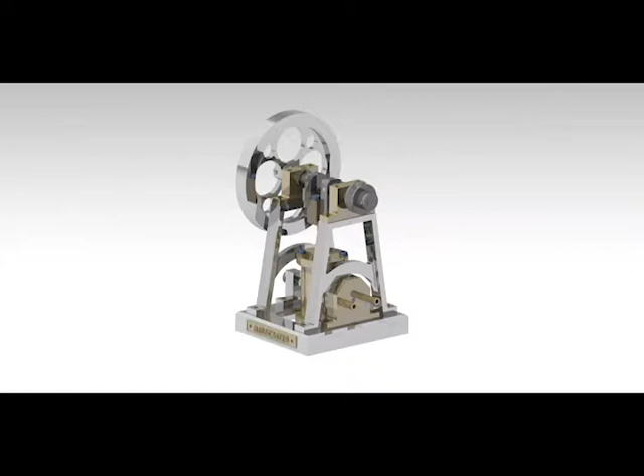Hi there, my name is Tucker Hawkinson, and welcome to the first part of a two-part series on our EGR305 project. The overall goal of this project was to create an engine using a predefined set of drawings for all the engine parts. And as you can see from the image in the front, we ended up choosing the double

oscillating engine. This engine had many components, and we decided to break it up as it was broken up in the drawing. That meant that we had four main subassemblies that were broken into other subassemblies. The first main one was number 1, and that is the base of it. The second is the flywheel and crankshaft and the pulley. The third is the cylinder in the bottom left. And the fourth is the piston assembly.

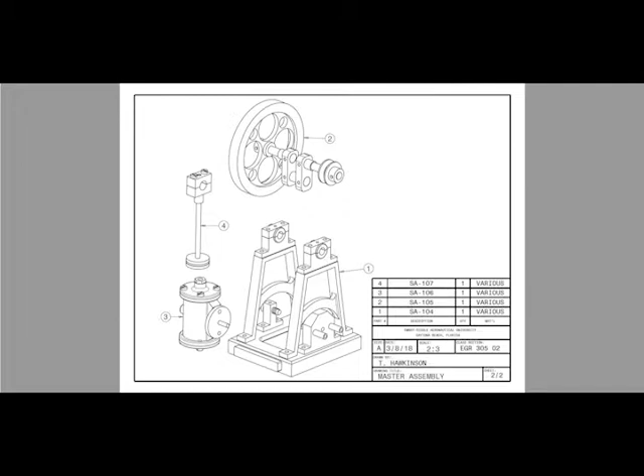So now we're going to break it up into subassemblies. The first subassembly that we'll talk about is the flywheel and crankshaft subassembly. This subassembly, as shown right now on the screen, consists of a flywheel and a crankshaft and a pulley. So we're not going to go into how every single part was made, but there are a couple that I do want to point out since they were more complex geometry than others.

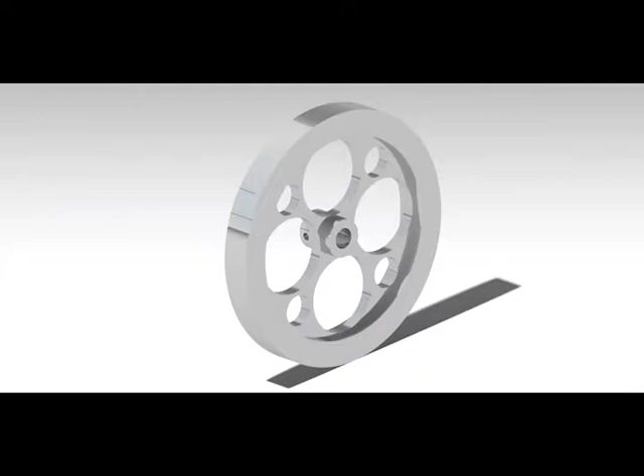The flywheel is one of them, and a simple solution to this one was to start it by one shaft command getting the grand majority of the geometry, and then from there we were able to cut out certain areas and make some circular patterns, as you can see, to create what seemingly complex geometry.

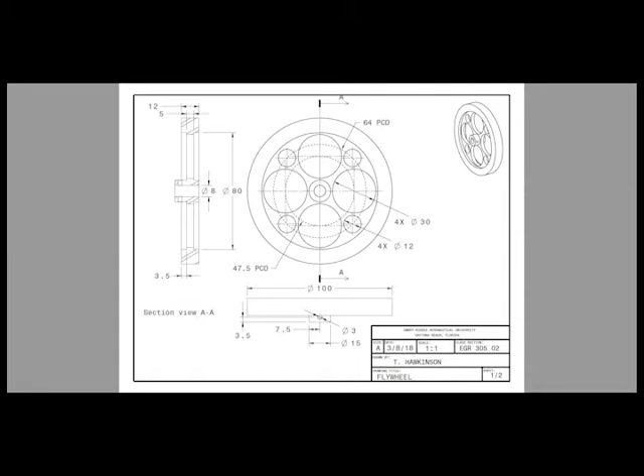The crankshaft was not a complicated part, but had a lot of pieces to it. As you can see, it's made up of a few different pieces. There's two rods that end up connecting to the pulley and the flywheel. There's one rod in the center that connects the piston assembly, and then there's two blocks that allow an eccentric

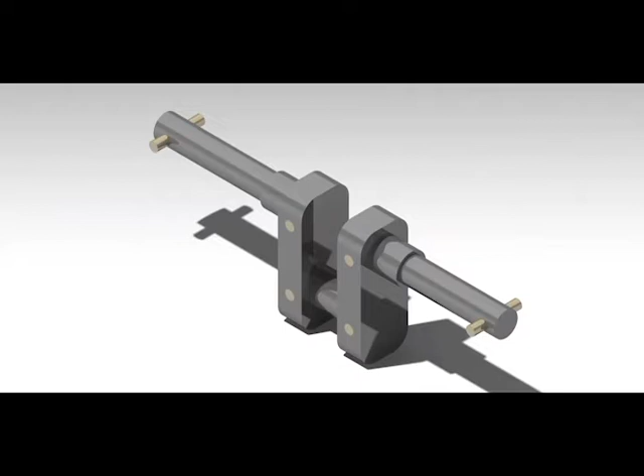rotation around. The brass pins that you see are press fits in there to allow the whole assembly to go together. Again, none of these parts were very complex. It just created an extra subassembly. The pulley was an extremely simple part. It just had a single shaft command with a hole through it. The geometry on the shaft command was a little bit complex, but nothing too complicated.

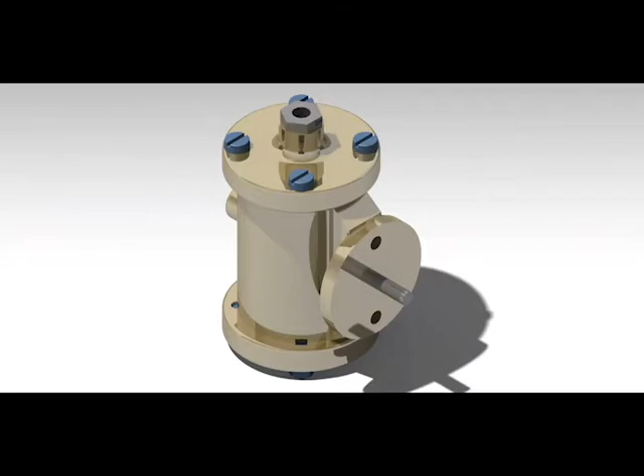The next subassembly was the cylinder subassembly. This subassembly had quite a few pieces. There was the main cylinder piece, the upper cylinder piece, the cylinder base, the cylinder pin, and a piston rod gland, as well as 8 panhead screws. The main cylinder piece was probably the most complicated piece on the entire assembly, on the entire engine even.

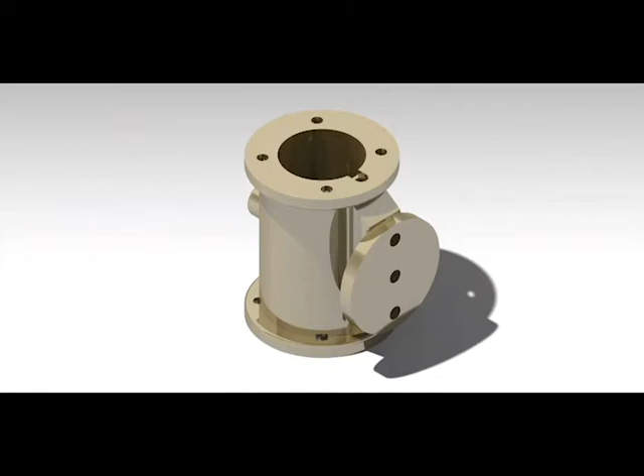It started out with a shaft command. From there, because of some of the geometry, we had to create a plane that was offset a certain distance, and from there we'd pad the plane back out, and then we'd rotate it around a little bit and pad from the other side to create the sort of slightly harder geometry that you see in the side view.

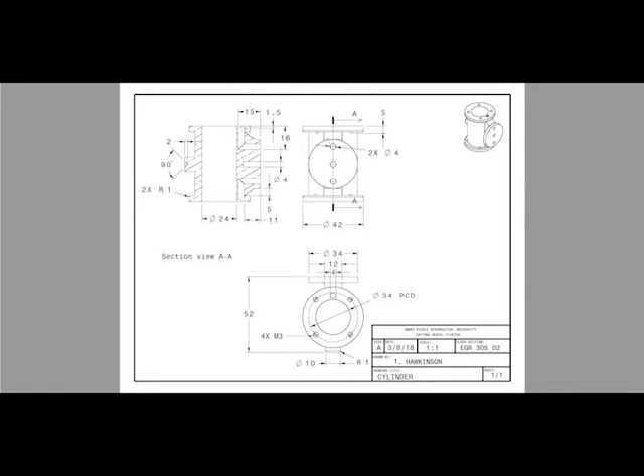The most complicated part about this, though, was the slots that you see on the section view AA on the right hand side. Those slots, we tried to create those using two holes perpendicular to each other, but the geometry wasn't correct. So what we ended up having to do was pretty much a swept cut.

The next two pieces are the cylinder top and cylinder bottom. These were not complicated pieces. They just took one shaft command around the center, and then some bolt holes. And the most complicated part of this was the 30-degree angle that you see to allow some relief for the gases running through the engine. That had to be done by using a mirrored extent and cutting that away.

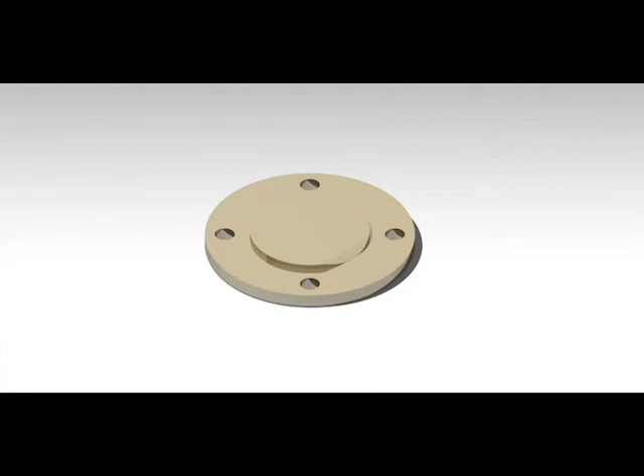And the next two parts are very simple parts. The cylinder shaft, which connects to the front of the cylinder to allow it to rotate, and the hex on the top, which allows a good seal between the piston assembly and the cylinder assembly.

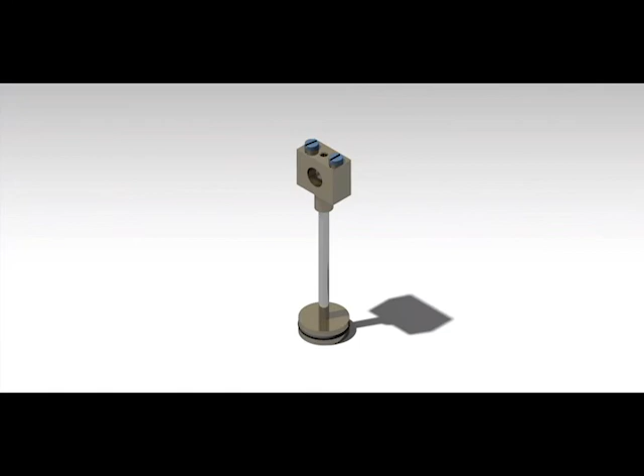The next subassembly is the piston subassembly. This consisted of the top piece, number 4, which is a set of 2 pieces that create sort of a pillow block around the top. Those are attached with M4 screws, and those connect. They're threaded to the main shaft, the main piston shaft, and at the base there is the piston end with a seal around it.

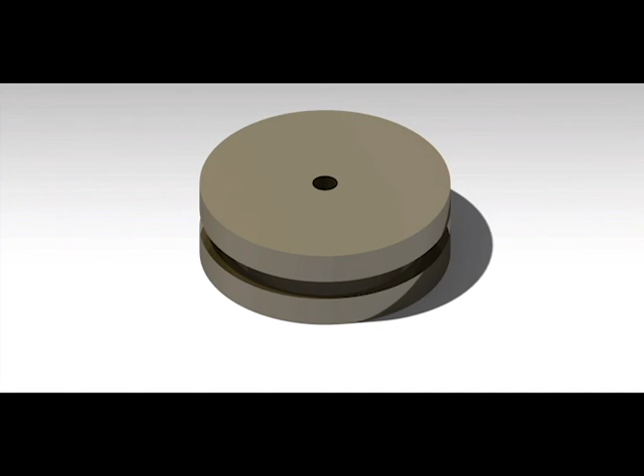None of these parts were overly complicated. They were all very simple shaft commands. The pillow blocks were the hardest pieces. That was a pad with an offset plane and a shaft command. The final set of assemblies will be handled in the other part of this video.